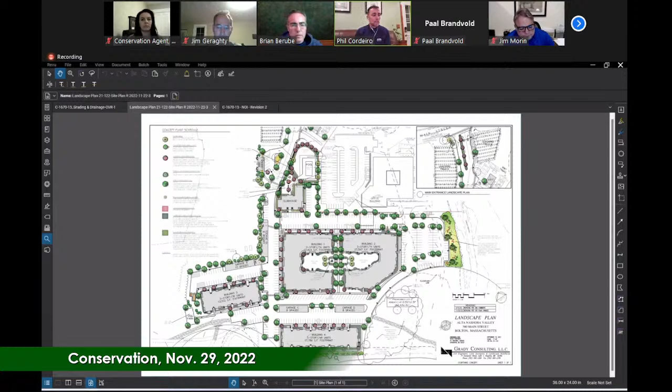The first one that was raised is we are doing a sidewalk behind Building 4, a pedestrian footpath that will be sandwiched between the residential building and the southerly pond and the BVW that surrounds the pond. The commission had asked of our willingness to consider an alternate material for that sidewalk. So we have proposed in the revised plans to use stone dust. So it is slightly less impervious than asphalt. So it is a betterment in that regard.

We do want to make sure that the commission understands why we've elected for stone dust. It's a compactable material. It's a gradable material. More importantly, it's an accessibly compliant material. So should we have any residents in Building 4 that are handicapped and require wheelchair accessibility, they can maneuver and navigate on there. We also do have our playground currently located behind Building 4.

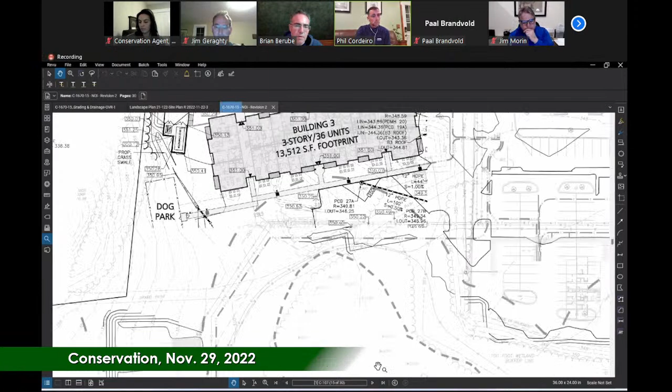We want to make sure that that portion of the sidewalk that's necessary for them to cross—let me flip over where the sidewalk is shown, and the playground, forgive me. So we have the playground in the southwest corner of Building 4, as you can see on the screen. So there is a portion of accessibility requirements from the parking field due west of Building 4 to at least get to that playground. So we felt stone dust, in our opinion, would be a decent compromise between the request of going more permeable, but still making sure that the residents can utilize the area effectively.

At the last meeting, the commission asked for more information regarding snow management. This is a bit of a broader topic for the site, and I think the best way we can approach it for discussion is we have a very large site that is very small, and it's very small for a lot of reasons.

We have not only the residential buildings, we have the surface parking that supports the residential buildings and the vehicular access ways around it, but we also have the resource areas and buffers that we're here to discuss with this commission. We also have our public drinking water supply wellhead protection zones, the zone 1. When all of those elements are put on the same piece of paper, our very large plot of land really becomes very, very small, quite frankly.

So what we endeavored to do in the response letter to you is to outline what our routine snow management practices would be. Alongside each of our vehicular traveled way, we maintain what we call a snow shelf. This is routinely a shoulder alongside of the roadway that allows plows to basically go down the driveways and move snow off the driveways onto the shoulder of the roadways to create passability.

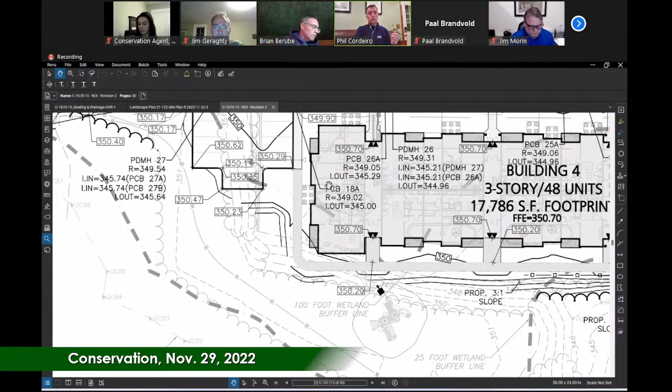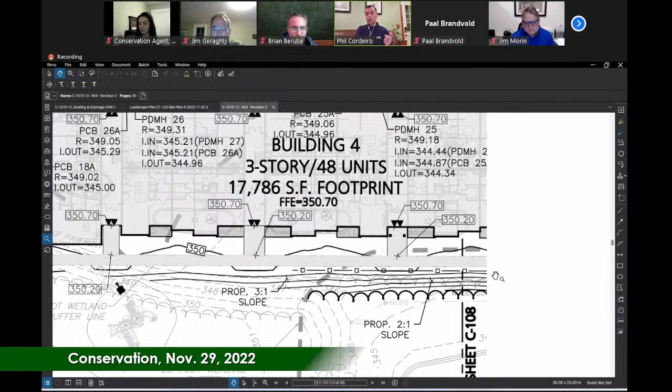You sort of see it partially here, right behind building 4. This dashed line with the square picket denotes what we would put in adjacent to the BVW area and adjacent to the pond on the rear of the building. That actually continues around on the easterly side of the building, just to the point where the parking is. We would use those as a visual barrier.

And similarly, let me just jump over to the other plan. Forgive my delay here.

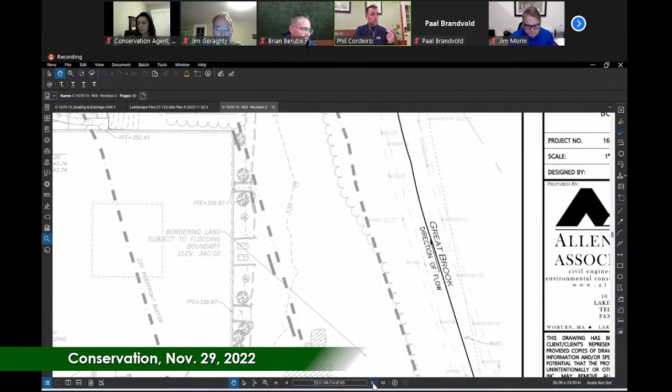We would have a similar post and rail fence along this easterly parking tray, which is abutting more sensitive resource areas, most notably the riverfront to Great Brook and the BVW to Great Brook. So we'd seek to use those as landscape-based stylistic choices in lieu of the snow fencing.

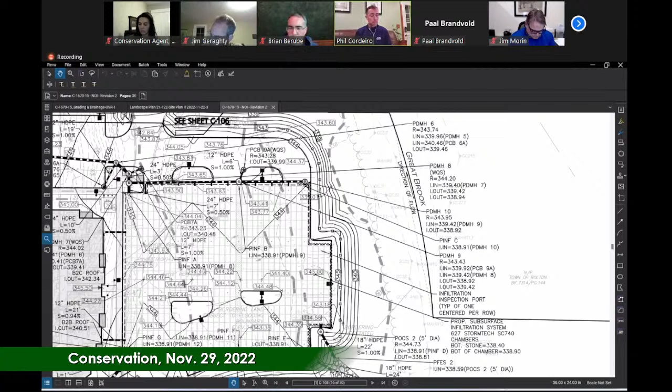We're happy to entertain discussion on that here this evening after the presentation. The other thing that the site affords us the opportunity to do is, again, we want to recognize that there are large resource areas on the property, and the concerns this commission would have in terms of resource area protection. We have an opportunity to make sure we're doing our part to protect these resource areas, and snow management is key to that.

Not only just the actual movement of snow, but also the pre-treatment for ice buildup on the roadways. So we welcome a discussion tonight about what the commission would prefer, or maybe an inherent policy, what you've done on other sites in town as restrictions, or better said, alternate methods of de-icing. So instead of overloading the site with salt, maybe it's a calcium chloride, maybe it's liquid, maybe it's sand. We'd like to get the flavor for what the commission typically utilizes as part of the overall management.

The next item that came up was some additional information relative to landscaping, again, against those sensitive areas. So changing my screen now to the landscape plan behind building 4. This plan is now in your package; it wasn't in the last submission set. This has additional detail for those slope areas directly adjacent to the resource.

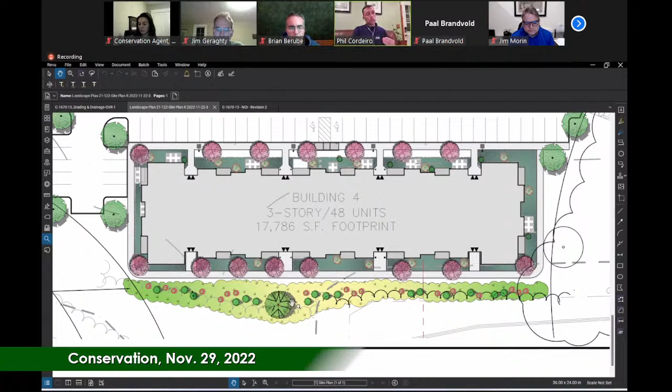What's in there is the notation that we anticipate seeding those slopes with the New England Conservation and Wildlife seed mix. We will also plant native shrubs and evergreen, including pin oak, eastern red cedar, winterberry, and blueberry, all done under the auspices of our landscape architect. The idea of these slopes is we would allow them to grow naturally, with minimal mowing, minimum vegetative removal once they're installed, and of course, no fertilizer, choosing plants that can survive on the slope adjacent to these resource areas without fertilization.

So this would exist directly behind building 4, but then also the slope that's on the easterly side of the parking tray adjacent to Great Brook. Those plans have been provided with the additional detail the commission was seeking, really as confirmation of what we're going to do, and then just let it go, let it grow naturally, and it'll do its own thing inside the resource area buffers.

Number 4, the commission's agent made a request about changing the angle of discharge for our stormwater flared ends off that easterly parking tray. I'm happy to accommodate that. We've rotated the angle, so rather than discharging it in a more easterly fashion, which shortens the distance between the resource areas, we're happy to direct it more southerly.

The southerly direction has a better benefit in that it increases that on-surface movement time. In low flow, high frequency precipitation events, it can actually help feed the wetland replication areas by providing surface water to inundate the groundwater. So I think we've solved a couple of problems there, and made a betterment in the solution as to how that whole area is going to function at the end of the day.

Comment number 5 on the letter is that the commission wanted the plans to be as complete and thorough as they can be at this point. So the question of irrigation was raised. We have the anticipated use of irrigation on the site, but what we don't have is a design of irrigation. We have not engaged the irrigation consultant. We don't know where the well is located, where the components are, or what the spray patterns would be. That's all elements that would come as part of the full and final design.

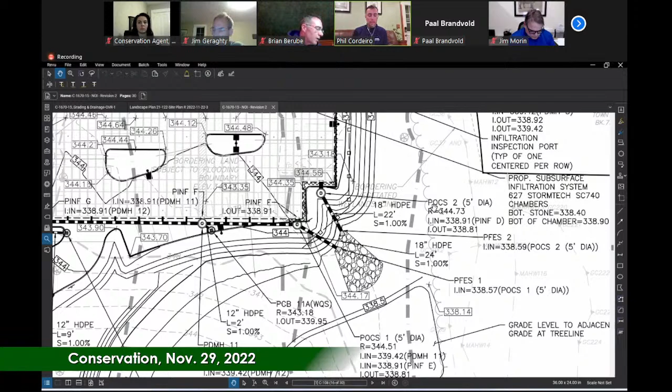Response 6 was again a confirmation because we have changed the layout of building 4. If the commission was inclined to ultimately issue a decision on this site plan, you wanted reasonable confirmation that the fire department, who would probably be most affected by this layout change, did not have any issue with it.

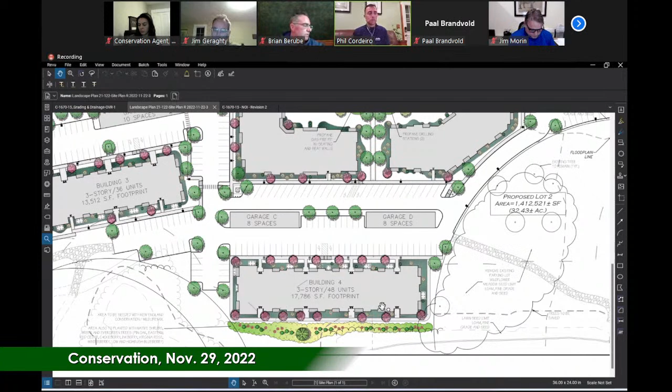So we did communicate with the fire chief, Jeffrey Legender, excuse my mispronunciation. He did provide an email to the commission's agent for record that he has reviewed the plan and is comfortable with it, that it meets his code demands, accessibility requirements, firefighting demands, etc. No further action would be required on the site planning part with him, even though we have many more meetings to come as we detail fire alarms and other elements of the site planning.

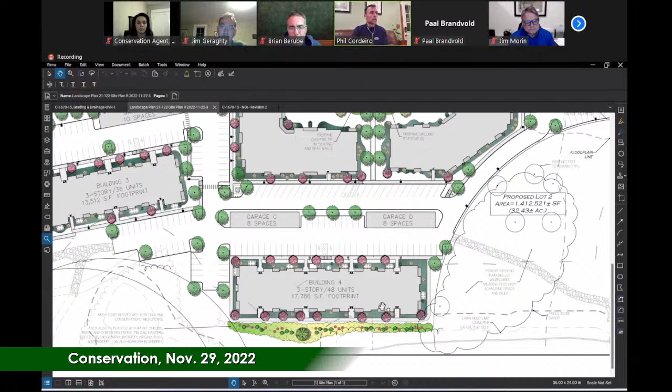We did also coordinate with him, and I'll jump to it so you can see the cross section here. It'll just take a moment to load. Forgive the delay. We also wanted to make sure we got onto the plans the dry hydrant specification that the fire department wants in place off of that rear fire pond.

It's simply a 6-inch PVC pipe that's going to be buried at least 1 foot above the bottom of the southerly fire pond, the retention pond, to make sure it's always intaking water. That's to meet the fire department specification. That 6-inch pipe simply will go to a dry stand pipe, a 6-inch pipe with a bell on it that they can connect to, and they will actually draft the water out of the pond.

Oh, there we go. Try one more time. I just want to be able to show it to you here. So this is what you would be looking at, the rear pond. This portion on the right would be the actual pond.

We need to make sure the depth of the PVC is at least 4 feet below, 4.5 preferred, for freezing conditions, and a foot up from the bottom of the pond so it's not drawing muck. The end of the pipe would be equipped with a strainer and an anti-vortex plate, which prevents jostling the pump and ensures you're just drawing water, not air, through the line — it breaks up the vacuum. We would maintain that pipe at 4 feet of depth and bring it up to a dry stand pipe meeting their specifications.

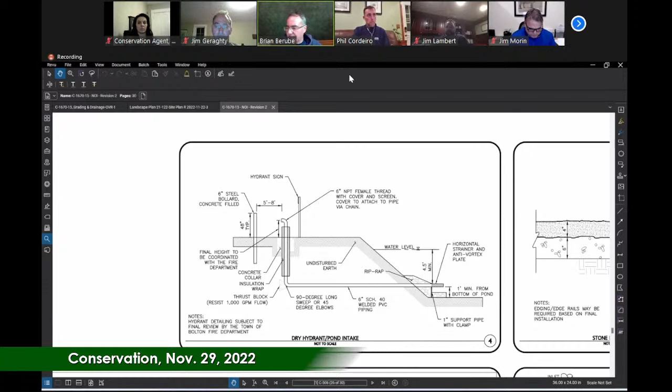No, and Phil, I do appreciate that update. I think you addressed everything, all the notes I had taken about things we had discussed. I think you did get through all of those, which I do appreciate.

Well, I'll open it up to the commission soon for their questions and comments. But just a few I had offhand starting out, the compacted stone dust, I can see the reason. I understand it needs to be ADA compliant, and that is more of a pervious surface. So I could see that use as long as it's properly maintained. I appreciated that.

Yeah, the snow fencing and the maintenance around that, in the areas where there's split rail fence, I can see that working as a similar deterrent to what snow fencing would do. Without being bright orange, Mr. Chairman, right? It's a visual barrier. Yeah, it could also be written into an order of operation and maintenance plan too, about how to basically, or at least what to avoid.

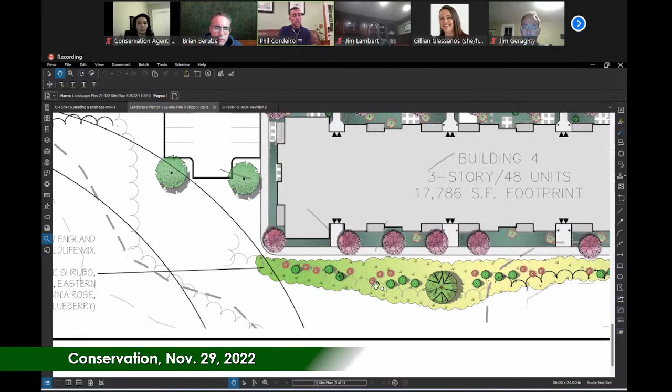He provided the slope planting detail, which I asked him to do to answer that question, but he provided it in a very continuous manner, when in reality what's going to happen along that back slope - and I'm really zooming in here, right off the back of building 4 - we would have a continued stone dust path that would lead to the playground zone. So there would actually be a break for a path through that slope to get down here.

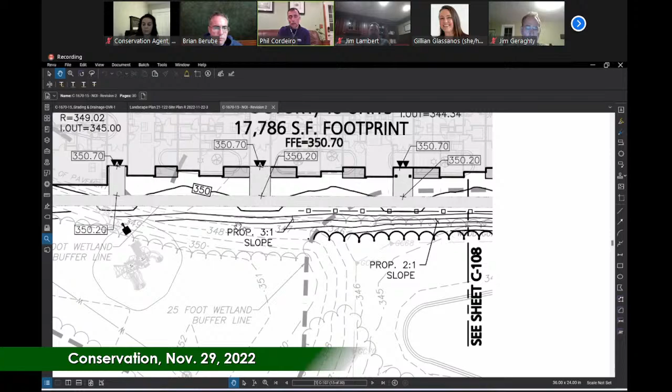Now you'll notice I've really zoomed in here. These darkened lines represent the contouring that we have. So the contouring in this area actually flattens out quite a bit more than it does as you move easterly, more adjacent to the pond. So those slope plantings will be more densely done to the east of the playground than they would be directly adjacent to it. But this colored plan, as it loads here, is just to confirm the design intent and the landscape intent.

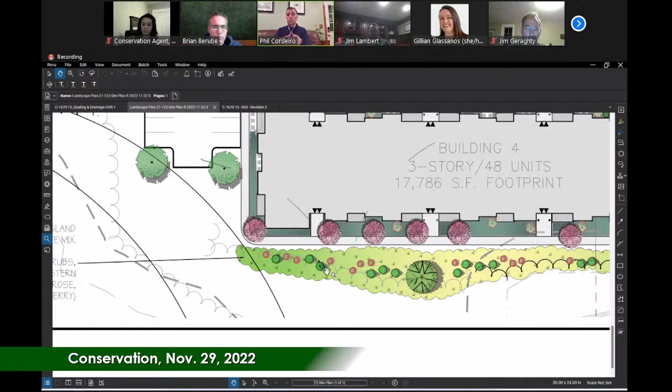So those will all exist together. There will be a graded path. It will be accessible in terms of the ADA definition of accessibility to get to the playground. And I know I missed one meeting, so we might have already covered it, but the playground itself - have we talked about that? Like what is the construction?

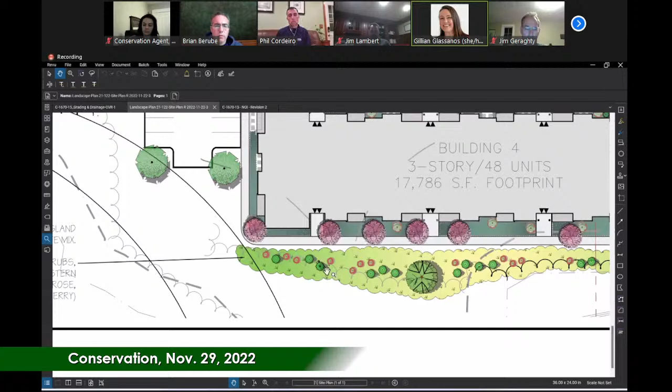What is the ground? Is there grading there? Does it flatten out there? It grades down to the playground, but then is it flat there? It is flat there now. So there's a tapered slope, and we'd endeavor to build it on that flattened land that is adjacent to the BVW and within the 100-foot buffer.

So in terms of - this is another one - the final design, obviously we have to do the final design for it. We anticipated including a perimeter boundary, whether it's a plastic edging or a timber edging or something like that, to encapsulate the playground with a soft bedding material within that boundary for fall protection for children.

So soft bedding being like the rubber mat, or soft bedding being mulch? It could be like a mulch product.

Yeah, I'm interested in more toward the final plan of that, because there's so - and then the maintenance plan and the size, I guess, I don't know if the size is on there. So many playgrounds wear out so quickly, because kids are kids, right? They go from brand new to looking 25 years old in 6 months. So pieces can fall off, and they're made of plastic now, not usually compostable material.

I think that's probably further discussion, Brian. Yeah, I was going to say it brought up questions about it, and me too, because I realized I didn't - well, should have realized it wasn't on earlier plans either - because it is 100% within the 25-foot no touch.

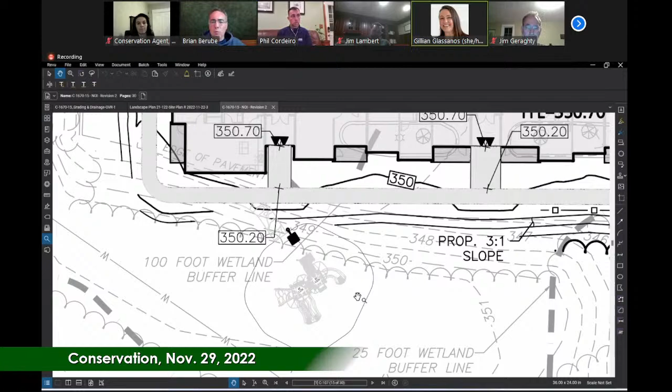Were other areas considered? I'm looking over to the side of the building—are there other areas that could be considered for that? Because that's a lot of sprawl with kids, trash, throwing rocks and kicking stuff, and that's the type of stuff we want to keep out of the 25-foot buffer. We understand the need for the path and the ability to get around the building, but putting a playground in the 25-foot buffer zone is something we would 100% try to avoid. So is there an alternate analysis where it can't be placed someplace else on the site?

Yes, right. The reason it was chosen in this location is it works out from a grading perspective. It's actually in a green area of the site, which is where you'd want a playground and a gathering space to be, as opposed to surrounded by pavement. The area had also previously been generally disturbed. The current well is here—I'm highlighting it, one of the current drinking water wells—and that well is going to be decommissioned. So we actually targeted back here because it's adjacent to the wetland resource areas, because it's where we'd want a park or playground to be, and because there was already grade work done back there. So it was actually intentionally done.

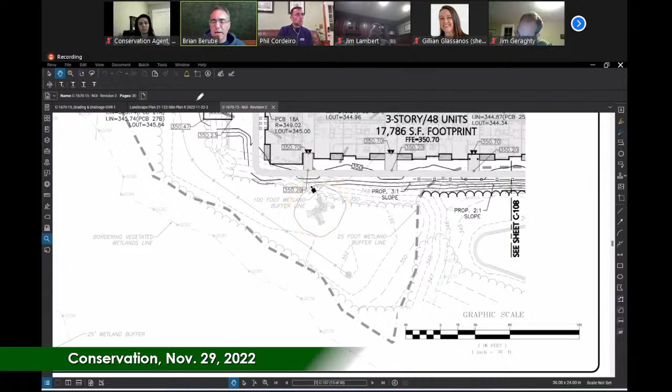I think it would be good if we could get a circumference or square footage stating the playground area will be no greater than X—to give them enough space to design ladders, slides, all that good stuff, but to have a maximum amount of disturbed area, either as a circumference or total square footage.

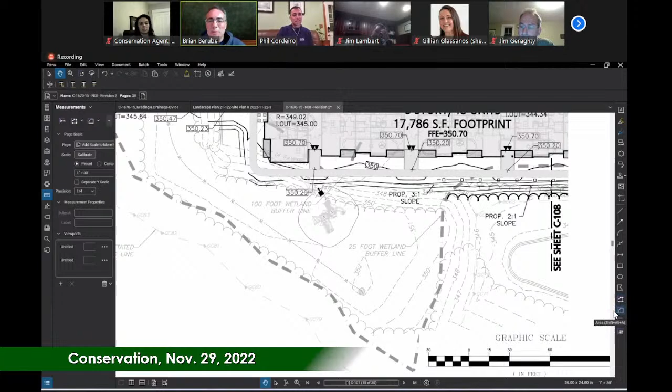Understood. I'm going to do it in real time, so I can give you the number as we're talking. It was going to say, depends on how quick you can do it, because we have other things on the agenda. No, I understand, and it's been a long day already. No problem at all. We'll continue on in our discussion, and I'm just going to do it while we're talking, and you'll see the number as it's produced on the screen, and we'll keep going.

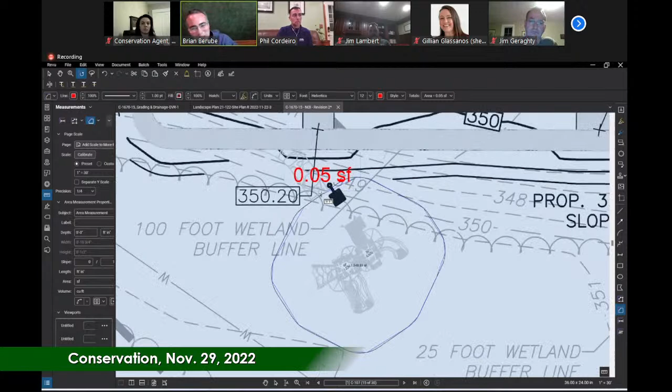All right, so I guess those are some of my questions, just following up on Gillian's questions. Other members of the commission, any questions or thoughts either about this or any other aspects of the revisions we've seen tonight?

Yeah, I think there's still an open issue on what the de-icing material is. Do we want to try and land on that, or is that... I don't know what they use currently on site, or if it's part of the conditions that currently exist.

Say, Phil, do you know offhand what their current maintenance conditions are for? I don't, and Jim, thanks for bringing this up, because you asked us about what we had done in the past, and we honestly haven't done projects like this in the past, really, ever. It's usually single family homes or two or three homes, and most of the time we just disallow any salt or sand altogether, which I understand is not really viable for this project. But generally speaking, we say no salt or sand within the resource areas, hand de-icing and vehicle, and that's about it.

But things like calcium chloride would be acceptable, which is a salt alternative, and it's liquid. That's a good question, and again, I'd like to hear Rebecca's thoughts on that and look into it a little bit more to see exactly what it is, because I know things need to get used, and sometimes it's a question of if you're salting and sanding, are you then street sweeping, or if you're using sand, are you also reclaiming it? Are there catch basins for that? How exactly is that being done or cleaned afterwards? Something along those lines, I'd kind of like to see what the plan would be. And again, I'll ask Rebecca on the calcium chloride too, I'm just not that familiar with the different methods. But thank you for initially answering that.

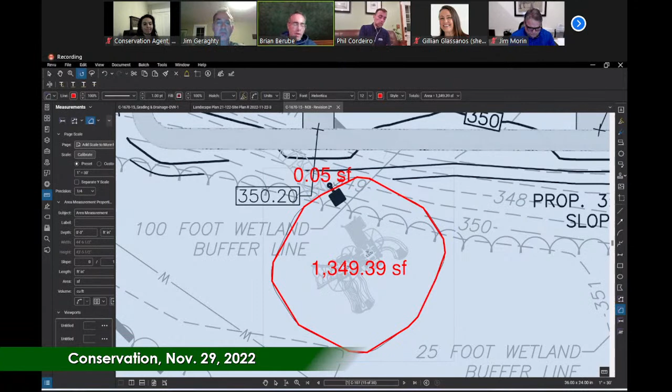Other comments or questions? And Jim, I think giving Rebecca a chance to weigh in might answer your question a little bit more. I'm hopeful. But any other initial thoughts or comments, questions? All right, so Rebecca, I'd love to hear your thoughts or comments on anything we've just discussed.

Okay, I'll address the most recent question first. So Brian, I was shaking my head no in response to Phil regarding the last suggestion. I'm familiar with that material, I think it does work well. However, I was shaking my head no as to we had not allowed that, or the commission had not allowed that rather, in the past within jurisdictional areas. So again, just referring back to what Brian's talking about, resource areas, he's also talking about that 100-foot buffer, so he's talking about the jurisdictional area too.

That being said, now obviously that is a significant portion of your parking area to the east. And then in addition to that, it has, I think, a portion of, if not half of, the parking and access on the opposite side of building 4. So that all being said, I don't think it's up to the commission to decide what you can use or to suggest which treatment to use, but rather they can restrict no treatment within the jurisdictional areas, or suggest that to you, and or they could suggest a material. Typically we don't, similar to suggesting erosion and sediment controls. We really let the applicant define what they're suggesting, and then the commission responds yes, that's a good method, or no. And there's obviously reasons behind that.

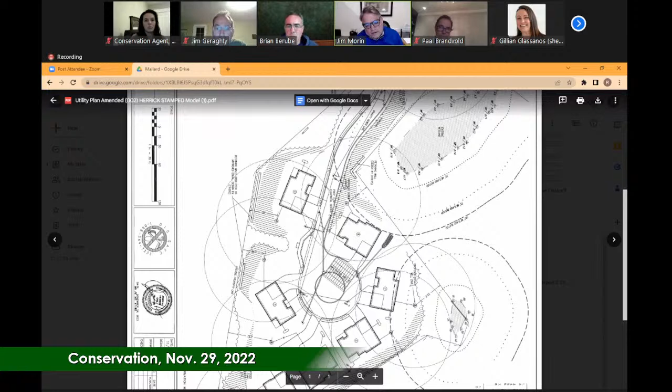So there's nothing in the buffer zone behind unit 8 anymore. And it's on the official stamped plans.

Rebecca, did you have any comments, questions, or thoughts regarding the revisions? I did not at this time. I did reach out to Jim via email. We corresponded earlier today, just regarding some additional information regarding the landscaping plan. And I believe he heard basically what some of those concerns were between the last hearing that he just sat through, and then also the correspondence that we had.

In terms of what's on the roadway, snow removal, I did note that in the O&M it did talk about snow removal, but more in a general term. Same thing with some of the other items. Jim did note that the Homeowners Association would be maintaining it, which is helpful to know, but the commission may be looking for a little bit more information on where snow removal would be. Is it stored on site? Is it taken off site if stockpiling does occur? And then just items associated with any mowing - are things going to be left to grow into a meadow-like structure instead of a lawn, shorter? Jim did provide a landscaping plan in the original; however, there was a little bit more information too that we were looking for.

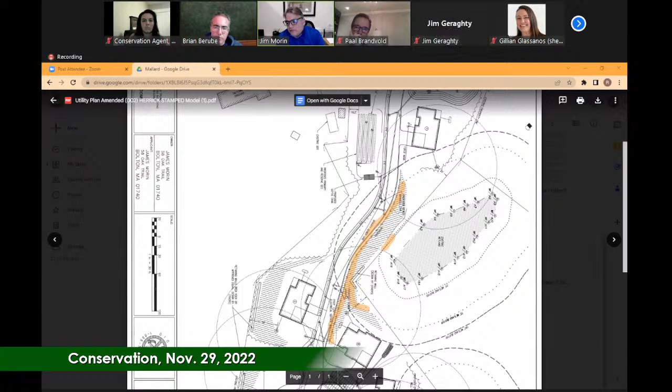Then the other question was, around these units, it's projected to be roughly 20% lawn, 20 feet around the unit as lawn. And each unit is supplied by its own well, and it will have its own irrigation system. So other than that, that would be it.

We did cover the, I forget what sheet it's on, but it was submitted to the commission under the sheets for the snow storage and so on. Rebecca, do you know what sheet that's on? Because we had to do that for the zoning board too. If you give me one minute, I will try and grab that. That was a question they had - where would we be storing the snow? And it was to go on site. There is, once we went down to 8 units, some open space along the roads.

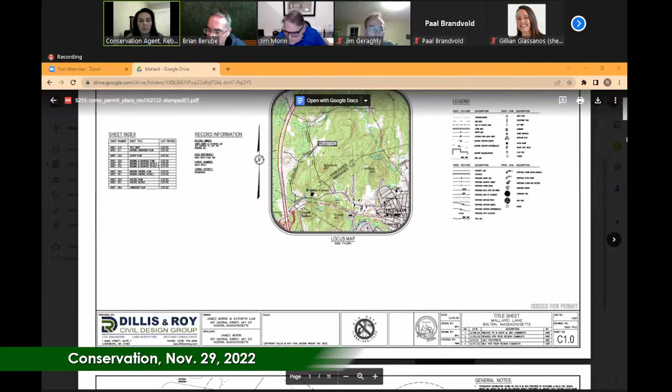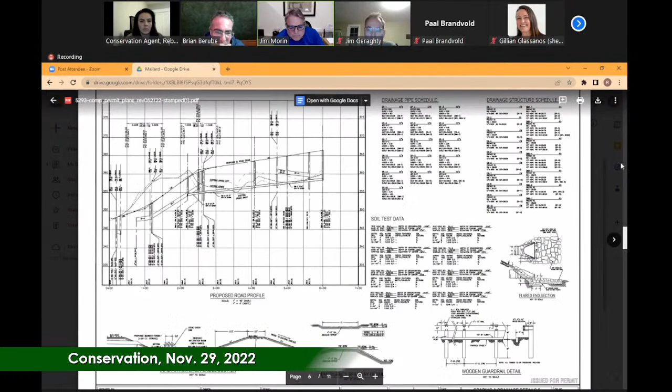I might give everyone whiplash, so I apologize. No, that's stockpiling during construction.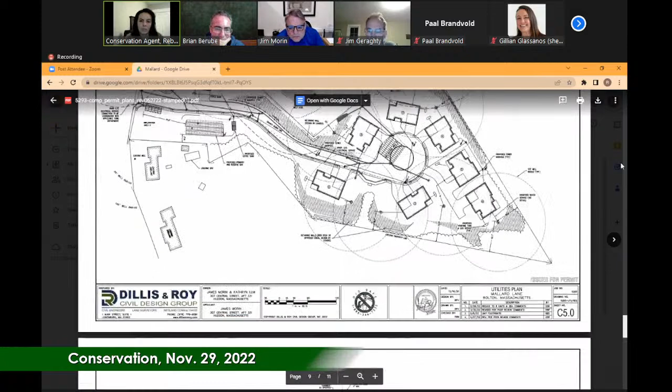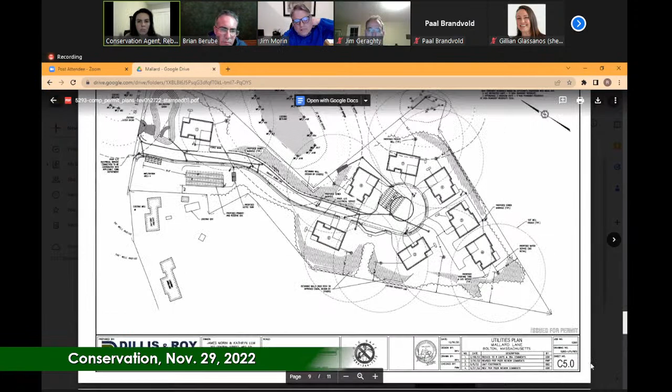Do you know where you had it annotated? Yeah, it was on the plans, Jim. If you're coming in Mallard Lane, it was to the right. It was to be plowed and stored to the right side of the road. On the septic system? Well, it won't go on the septic system. No, but there's adequate distance on that side, yes.

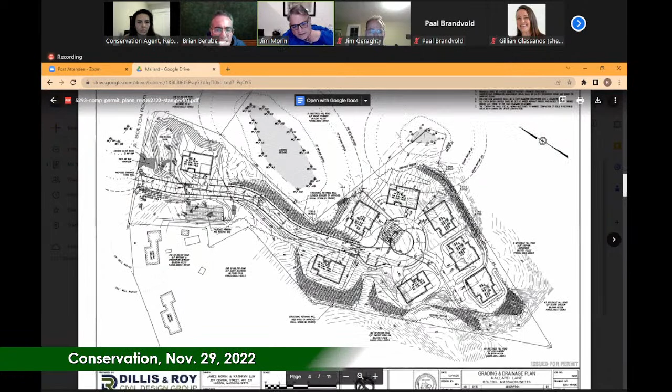So where that planting area is, that whole shoulder of the road would be storage. Beside units 2 and 3 was a big storage area for snow. And the other area I recall is between the septic system and unit 2, that whole area would be storage for snow.

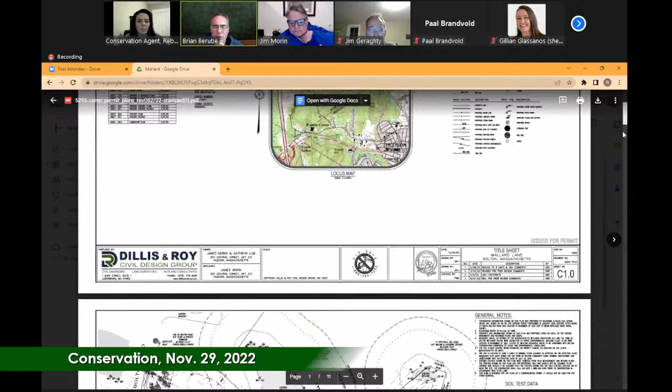So it was definitely outside the buffer zone as best we could. I was gonna say, if it's not already on there, Rebecca, we could condition that any snow storage or snow piling be done outside of the buffer zones, resource area and resource area buffer zones. And that should cover us, and should also leave you with plenty of land to store it without affecting things, hopefully.

All right. Do other commission members have questions or comments on anything we've just been talking about, or any of Rebecca's observations?

All right. Any members of the public here tonight to comment on this particular hearing? I see none at this time. All right.

I was gonna say, Rebecca, I know you had brought up snow storage, and then of course salting and sanding. I don't think we had anything on that. I think the operation and maintenance plan would be the usual, that salt or sand or a mix of the two could be used, but I shouldn't say - that's a hard one to condition the right way. And again, it's difficult with it being multiple homes. I know for safety reasons they need to use a basic approach to it.

I think the stormwater system, if you want to look at that detail, is meant to cleanse anything we use, such as sand and salt, and recapture it. So all the stormwater does get gathered on the site, and it's kind of a state-of-the-art system. If you look at the detail section, underneath the cul-de-sac, there's rows of plastic chambers, and the first row is wrapped in fabric to take out any of the impurities gathered in the road. This is all covered in the O&M.

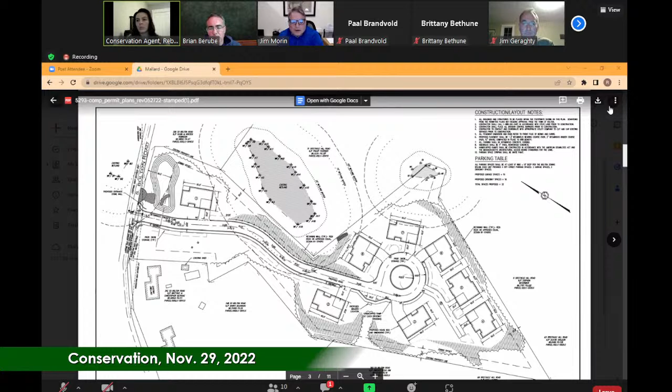I mean, what does the town use on South Bolton Road right there? Do you know? I'd be curious. You could certainly reach out to DPW, I don't have the answer to that question. Like I said, at least in the last discussion I had, they'd been focusing on doing more pre-treatment to reduce the need for more material being used. So that's why I'm echoing that approach, since it seems fairly successful, but that would be a question for DPW, and I'd welcome you to reach out to the director and ask.

Okay, I do like what Rebecca's saying about pre-treatment, and I would agree if the commission wanted to put that in the conditions. I think that's an excellent way to handle those concerns, because if somebody doesn't do pre-treatment and it ices up, they end up pushing ice, which can push impurities over the curb, like Rebecca was saying. So I really like the idea of pre-treatment as a condition, saying whoever lives here and is responsible, whether it's the homeowners association or a landscaping contractor, has to agree to do the proper amount of pre-treatment.

Yep, and I think, Mr. Chair, what the applicant had brought up about signage and not treating in certain areas, or pre-treat only and plow during the storm, I think conditions like that can also reduce impact to those jurisdictional areas, both areas. I've seen what he's referring to regarding the signs around the reservoir, and it's drivable, you just have to be more cautious during the middle of the storm, which you shouldn't be out in anyway.

Right, were there other members of the public that had questions or comments? Just thinking through, I don't see any. All right.

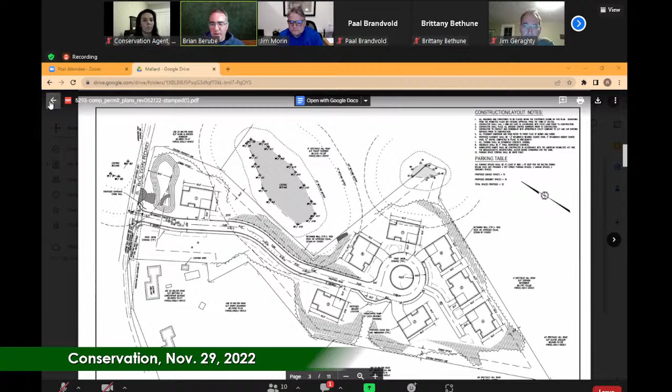So trying to think, where does this leave us? We could basically condition that for the maintenance of the pavement, especially during storms, salt and sand can be used as a pre-treatment only, and that any continual treatment should be sand only. And also that any stockpiling of snow be done outside the resource areas and buffer zones.

That's kind of where we had gotten to on those, because I'm thinking, Rebecca, there was also a question about some of the plantings, and I'd forgotten what you said about planting plans. So the planting plans, my past comment was related to incorporating native species within the planting plan, as far as where shrubs and trees were planted, which may echo what already exists on the plan.

But then in terms of maintenance of areas around the units, associated with mowing or removal of vegetation, what that might look like—it sounded like because of the limited area, it will be maintained as lawn, and areas shown as slope will be allowed to grow and not be maintained as lawn, more of a native grass herbaceous-like layer.

The other thing, just to back up and note—it didn't sound like any commission members had commented on it—but the other option for snow was pre-treat and then no treatment during the storm, just plowing. So that was the other option, but it sounded less favorable to those who had commented so far.

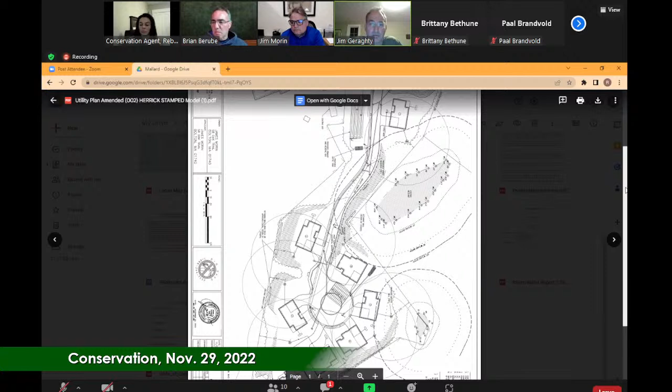Okay, and then as far as the pre-treating and/or sanding, commission members, your thoughts: pre-treating only, or pre-treating and sanding allowed throughout? Strong thoughts, feelings one way or the other? I would go with pre-treatment and sanding only, would be my suggestion. All right.

Rebecca, if in theory we were to close this hearing and vote on the order this evening, those are the only two additional conditions I have noted down here to put in: basically the salting, sanding of the driveway and the use of native plantings. Is there anything else that we would be missing?

I would specify something about snow storage. I know it was stated that it was on the plans, but not having it pinpointed in front of me. I think just establishing that it's to be stored outside of the jurisdictional area.

And then the other question or condition potentially for the commission that is not yet in the draft document is, because it is a vernal pool, and Natural Heritage did not put any limitations on the site regarding their conditions, does the commission have any conditions relative to construction? I know sometimes there's migratory barriers, basically where you put silt fence so the species go up to it and then go along it and around. On this site, they really can't go around—they'd be coming across the site.

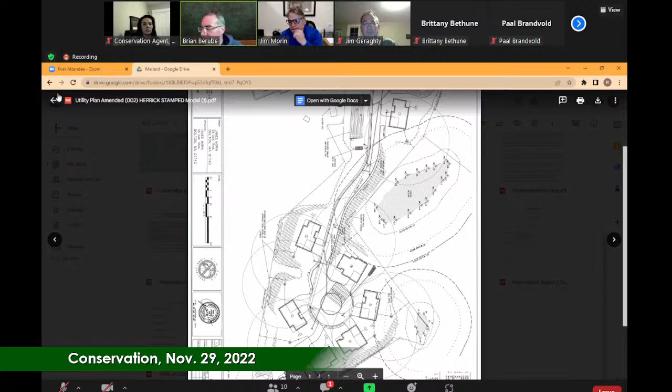Could I speak on that for a moment? Jim, please. So it was classified as a vernal pool, and fairy shrimp was the species I was told they found there, and they don't migrate. It was fairy shrimp and spotted salamander eggs, is what I've been told. Spotted salamander is the big one. I was told by them that it was the shrimp. Did they change what they found there? Do you know? Not that I'm aware of, but I don't know when you were told this information. That is what I was told, from Westborough Natural Heritage.

Either way, it is a vernal pool—there's fairy shrimp there, which defines it as a vernal pool. Other species can use it as well. I know that, but that's all I'm talking about, and the commission might not even condition it as such—that's at their discretion. If other commission members have a good way to try to condition that, I would love to hear it, but if not, I think it's something we might take no action on, knowing that hopefully it's going to be a one-year disturbance. Spotted salamander is a tough one too, but it's so difficult to pinpoint exactly when they will migrate and all of that.

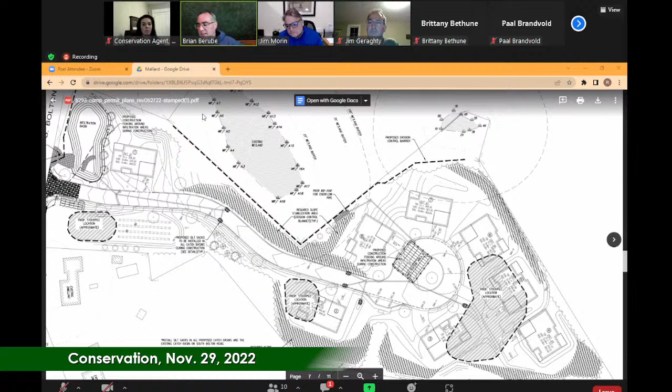In that case, I don't have my DEP file number in front of me, but I'd like to make a motion that we close the public hearing for Mallard Lane off of South Bolton Road. Do I hear a second for closing? Second. All right, all those in favor, starting with Paal? Aye. Jim, aye. Gillian, aye. And Rebecca, I'm an aye as well.

I'd like to make a motion that we issue an order of conditions for Mallard Lane as drafted and discussed, with the following conditions. I would say as drafted and submitted, and amended during this meeting. Just so what you're saying includes just the ones we discussed this evening, because I don't want to erase the prior conditions.

I'd like to make a motion that we issue an order of conditions for Mallard Lane as drafted and amended at this evening's meeting, with the following conditions regarding treatment of the roads during the winter: that treatment be limited to pre-treatment only prior to snowfall, and any constant treatment can use sand, but not salt. Also, that any snow storage done on site be done outside of the resource areas and resource buffer zones. And the additional condition that the plantings proposed on site, as discussed at this evening's meeting, that native species be chosen for those plantings whenever possible and practicable.

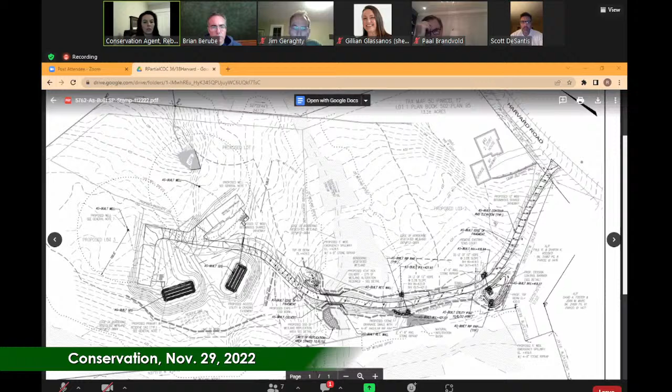And I can go over, I'm going to stop share again. I can go over the letter if you would like. I will paraphrase, Mr. Chair, if you would like me to. That would be perfectly fine. Yep, summarize or paraphrase would be great.

So this is from their engineer. They highlighted the utility poles that have already been through the commission, and the commission had to authorize those poles to be installed. The shape of one of the basins, which I will bring up the plan in a moment, was adjusted slightly to accommodate the utility. The design bottom elevation of the basin has been maintained, and it also includes riprap emergency overflow as specified.

Being on site both when the old shape and grades were present, and now seeing this, I believe this actually functions better, or will function better. I am not an engineer though, but seeing this from the engineer just echoed that as well.

The other note from the engineer is associated with the culvert and crossing that was installed. It was installed slightly offset from the proposed location. The retaining walls associated with the crossing were installed at a reduced width, 22 feet proposed versus 19 feet as-built. This therefore reduced the alteration to the resource area, which originally was 275 square feet proposed, and now it's 250 square feet as built.